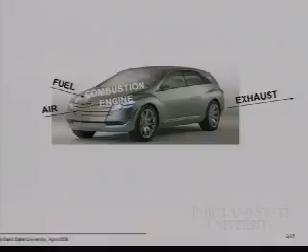So as you see here, the title is Powering the Future of Transportation. I want to begin by looking just at the automobile as we have it today, operated by fuel and air, combustion, taking that chemical energy in the fuel, transforming it into thermal energy, driving pistons, and then being able to provide propulsion. So watch carefully, there's the propulsion. If you don't mind, let me repeat that. I like that so much.

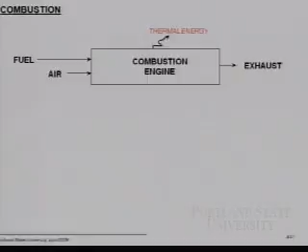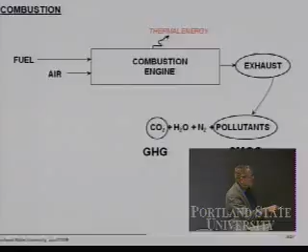There it is. But basically in a box, what we're doing is to take fuel and air in order to drive the engine forward. And it does give rise to what we want from an engineering point of view, the thermal energy, but it also gives rise to exhaust. And we have these species in the exhaust, which include the major products of combustion. CO2 is the species that leads to greenhouse gases, and then small amounts, but nonetheless very powerful amounts of pollutants that give rise to urban air pollution, which we generally call smog.

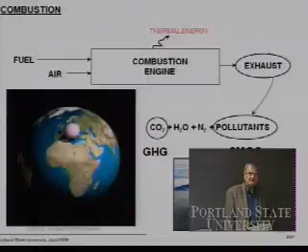To put this into the context of our natural resources, this is the Earth, and then that little sphere on there is the volume of air available to us on Earth. So that's what we're trying to protect for our own public health, and that's what we're contaminating with the exhaust to give rise to these environmental impacts. Another aspect of that air that we often don't think about is right here, which is the processing of air while we consume a tank full of gasoline. A tank full of gasoline for 20 gallons is about 160 pounds, so about a body weight.

And a good question for us is how much air do we process when we go through a tank full of gasoline? It happens to be quite a bit. It's a ton of air, 2,000 pounds. Now of that, as we know, most of that's nitrogen, but not all of it. It means that we are removing from the atmosphere 400 pounds of oxygen with every tank full of gasoline. And we have to ask, at what time will Mother Nature say, I can no longer replenish the atmosphere with that oxygen? Let me leave that question simply hanging.

But for the moment, we do use combustion for producing power. In fact, 80% of the world's power is from combustion. 94% of the world's carbon dioxide, the principal greenhouse gas, is from combustion. And 90% of the world's criteria pollutants come from combustion. We're tending to move toward a greater utilization of combustion.

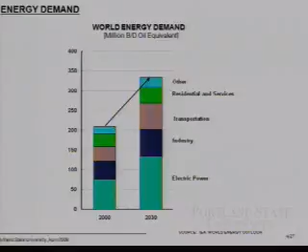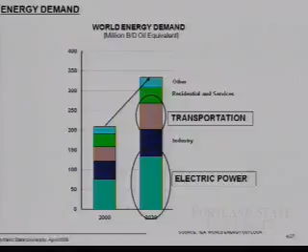Here's a plot of the amount of energy that we are consuming globally in the year 2000 and 2030. And one thing I want to represent here is simply the increase that we're going to be experiencing as now projected over the next 30 years. But I also want to indicate here how this is proportioned to transportation, of interest here, and to electric power. Both of those constitute the majority of our energy demand. Directly correlated to that is the carbon dioxide emission, or the greenhouse gas intensity. You can see they follow 1-to-1, going upwards by 2030 and having a contribution from transportation and electric power.

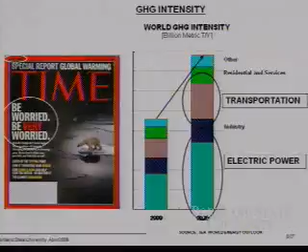That additional carbon dioxide is starting to tell a tale. And we see the tale now being represented by the media. This is my first evidence of a major news weekly stating that we have a problem. You can't see it, but this is April 2006, so about 3 years ago, almost to the day, when Time magazine said we should be worried, we should be very worried with respect to global warming, the impact of CO2.

So that's becoming a forcing function, forcing change. Greenhouse gas intensity, first really identified by the world's community as an issue not even 20 years ago today. A second forcing function goes back to the early 1940s when smog was first identified in the Los Angeles area, and a few years after that, the London episode with respect to coal particles and fog.

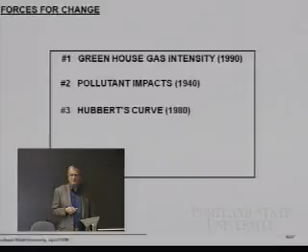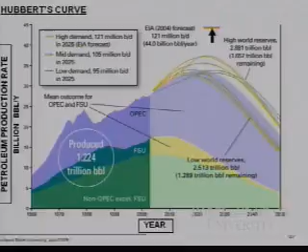A third forcing function is what I'm going to call the Hubbert's curve. This is actually very interesting with respect to driving industry to look for a different way of doing business in the oil industry. Hubbert's curve is a plot of the petroleum production rate as a function of year. And what this says is what we would expect is that as we go through the years, we're tending to want to produce more and more oil.

But what this also shows us is that there's a peak right here. It turns out to be at about 2020, where the discovery is going to be less than what we want to produce. This is now recognized within the industrial community, particularly the petroleum community, as being a reality. It's just an argument as to whether it's 2015 or 2022, but that's within basically the next 10 years, and is a forcing function to say we can't have this continuing dependency upon oil as our mobility fuel.

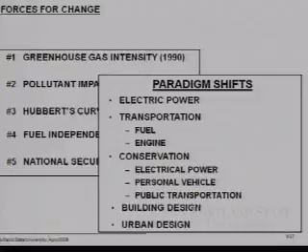A fourth and a fifth both came about due to 9/11, fuel independence and national security. So these are forcing functions doing what? They're leading to some very interesting and powerful paradigm shifts. I list them here. There are others as well, but we go from electric power, transportation, push toward conservation, building design, urban design. Many of you are engaged, maybe all of you are engaged in these areas.

As an example of a response to one of these forcing functions, global climate change, greenhouse gas intensity, is in California, AB 32. And you have something very similar going on in Oregon, although in California this is law. This is law, which states that by 2020 we must reach these levels of CO2 emissions that we had in 1990. So that represents a 30% reduction from what we're currently projecting in not so many years, 11 years. And the California Air Resources Board, who's responsible for having this be accomplished, is just now embarking on the regulatory aspects that are going to be needed to reach that goal.

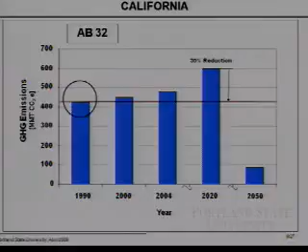Now, if you've been studying global climate change, you know that's an important step. You also know that's a remarkably large reduction for a state which is very much anxious to use its energy as much as it can. But it's not enough. We have to go further than that by 2050 to really make our contribution to bringing the greenhouse gas intensity to a level of reasonable state.

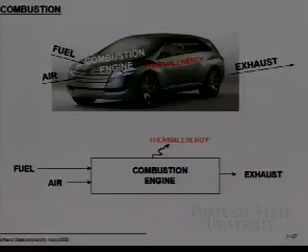Now let's take that background and focus in today's presentation on these two topics. I'm going to emphasize transportation, but we're going to end up talking about a nexus between transportation and electricity. As a result, I put all of that into the box. And I want to come back first to this diagram that we've just discussed at the beginning and start to work through it as to what changes we're making in this area by way of paradigm movements.

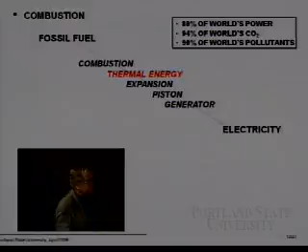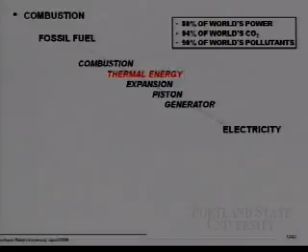Here we have combustion, which is taking a fossil fuel and through a variety of steps transforming it into electricity. We have the combustion, the thermal energy, and then that thermal energy expands, drives a piston, and turns a generator. Now I want you to be thinking from a transportation point of view of a Prius, of what we're doing in a Prius with the combustion engine to produce the electricity that then drives an electric motor and propels the vehicle forward. But we also do this to create the electricity in this room to a large extent. And we have these results that we alluded to earlier.

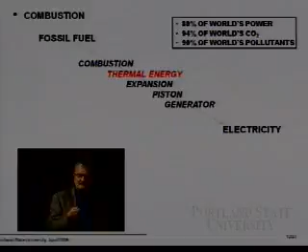You can almost feel intuitively from this sequence that there's some challenges that we've had to address over the years. Combustion leads to the formation of these criteria pollutants. In the combustion science community, we've done a remarkably good job to reduce the pollutant emissions from automobiles, from power plants. We've gone as far as we can, and yet it's not enough. And then you can see there are these processes that almost cry out inefficiency and metal moving against metal. They give rise to relatively low overall efficiencies in the transformation of that fuel to electricity.

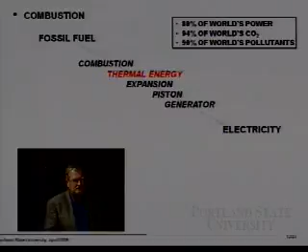What's going on is a substantial emphasis to look for a combustion alternative. And what's emerging is the technology of fuel cells, where in one step we go to electricity through something that's called electrochemistry. No combustion, so no formation of criteria pollutants.

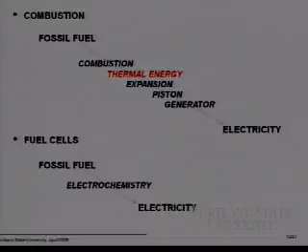And you can almost intuitively feel no metal on metal, so relatively high efficiency, and in fact it is. The other attribute is it's relatively low in noise. It's basically benign, no acoustic emission, almost to a fault. It's hard to convince you that it's actually working because we're so used to cranking and chugging and metal on metal.

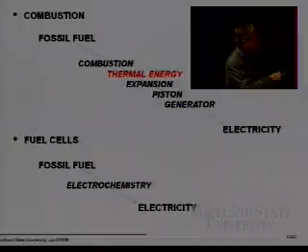So let's talk a little bit about this so that you can appreciate what it is that we have in our future. This is a fuel cell representation. There are three layers here. This green one is called an anode. The blue one is called a cathode. And that kind of orange in between is an electrolyte.

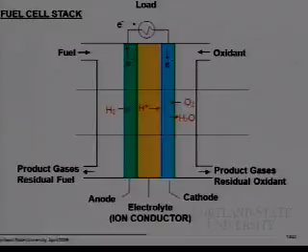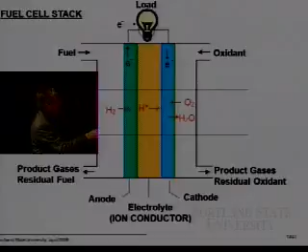Fuel comes into the anode, as you see here, hydrogen, and it reacts at the surface to form a proton and some electrons. The electrolyte says, proton, I welcome you, come on through. It says, electrons, get out of here. You're not going to come into my space. And sends them through another path, which for us is good because that path is a circuit where we can drive a load. And then the electrons come back to the cathode side, ionized oxygen that's coming in, and then that ionized oxygen combines with the proton to produce the product of water.

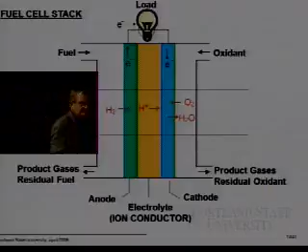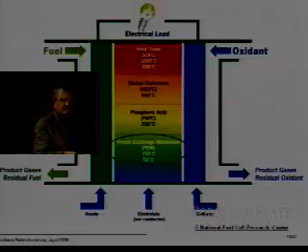There are different fuel cell types. They vary in the electrolyte, they vary in the temperature of operation. And here I show you those different types. This is the proton exchange membrane fuel cell. You may not be able to see it, but it operates at about 100 degrees Celsius. All right? And that's the go-to fuel cell for the automobile. The reason is that it doesn't operate at that high a temperature, and it's a fuel cell that you can turn on and off, which we want to do in an automobile.

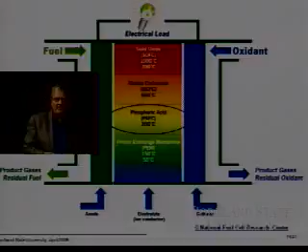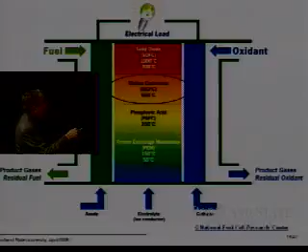These fuel cells up here are bigger, and they operate at higher temperatures. This is a phosphoric acid fuel cell that operates at 200 degrees Celsius. Takes about 3 to 4 hours to get started once you turn it on. Molten carbonate fuel cells, 650 degrees Celsius. Takes about 8 hours. This is now very popular in the marketplace. We call them advanced fuel cells, high temperature fuel cells.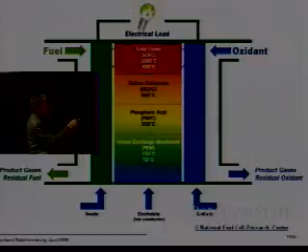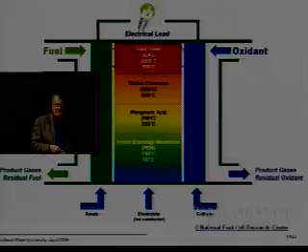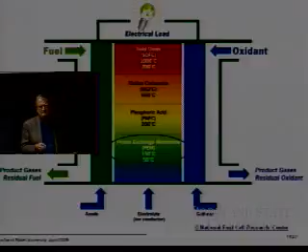And there's quite a bit of development going on in what's called solid oxide, which we often state is a holy grail of fuel cell technology for stationary applications. That will operate at 1,000 degrees Celsius. In the next year, we expect to see the first deployment of a commercial system. So these three are stationary fuel cells for electric power generation. And then down here is the proton exchange membrane fuel cell for the automobile. I'm going to focus on the PEM for the moment, and then I'm going to come back to the large fuel cells because there's a connection between the stationary fuel cells and our transportation requirements in the future.

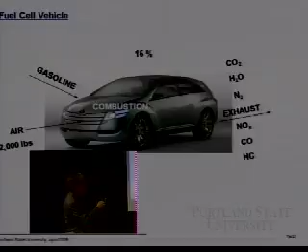So on PEM, let's go back to the automobile operating on combustion. Let's just start by replacing the gasoline with hydrogen. But first I want to point out that the automobile efficiency is 15%, which means that 85% of the energy that you pump into your gas tank is thrown away to heat. So you pay for your gasoline the next time, $30, multiply that by 0.85, and that's the money that's not going to be used at all to get you from point A to point B. Here's the 2,000 pounds of air that's required to process the tank full of gasoline.

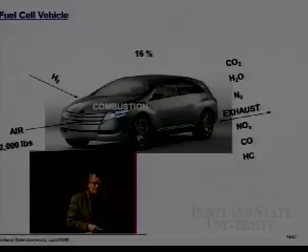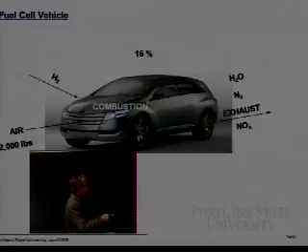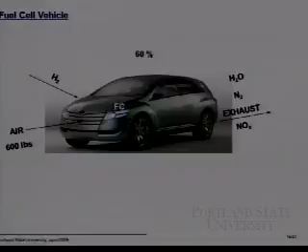Now, the fuel cell future likes to operate on hydrogen, so we are looking to hydrogen as being the fuel. It has quite a few attributes on this chart. One is that the carbon-containing species here in the pollutants go away, and then the greenhouse gas here goes away, at least with respect to the automobile operation. If we replace the combustion now with a fuel cell, we up the efficiency quite a bit. And that's one of its attractive features going forward. That reduces the amount of air required per 400 miles and almost reduces, and I think eventually will reduce, the oxides of nitrogen to negligible levels. Not quite there yet.

Examples of this that are being deployed and evaluated today is the Toyota Highlander hydrogen fuel cell vehicle. The first one to be deployed in the United States was in December of 2002, so 7 years ago. As a result, we've been doing this sort of thing for a while. We now have General Motors with their Equinox vehicle through their Project Driveway program deploying 100 of these around the country to people like yourself. You could sign up and be qualified. Most of them are in Orange County, California, about 60, some in Burbank and others in the Northeast. And we have a very aggressive campaign by Honda with their Clarity, where they're also allowing the public to have access to this vehicle and to drive it.

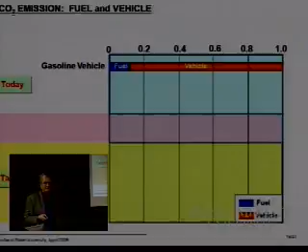One of the things I'm always reminded of when I look at this is how remarkably far over 100 years we've come in the efficiency of generating gasoline. It's not only due to the 100 years of technology development, but due to the competitive forces, where 88% of the gasoline that we get to dispense came out of the well. In other words, only 12% is used to extract it, transport it, refine it. And that's why this amount is relatively little. It's right around 12%.

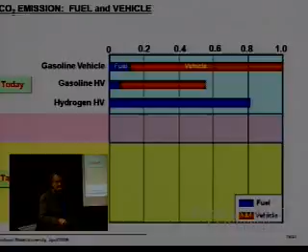If we look now at the hybrid vehicle, like the Prius, we see the improvement that we expect, like a factor of 2, because it's a factor of 2 more efficient. If we now take that same Prius and operate it on hydrogen, what do we expect? We expect that this carbon emission from the vehicle will go to 0 because there's no carbon in the fuel. We just showed that. And that's exactly what happens. There's no orange. But one whale of a lot of blue.

And this is where we're getting the hydrogen, in this case, from natural gas, which is the go-to source today for hydrogen. It also points out why operating a car on hydrogen with combustion is perhaps not the best strategy. It not only produces criteria pollutants, but it isn't that efficient. So here you get that 16% versus 60% argument. So if we now add a fuel cell, that gets reduced, but not nearly what we think it should be for this effort, this paradigm shift for the future.

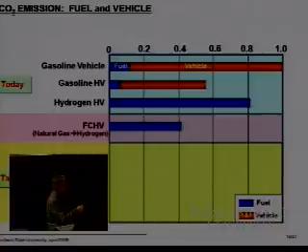So we have some targets down here. We think we're going to, and already are, improving not only the natural gas production of hydrogen, but there are also substantial improvements month by month in the efficiency of the fuel cell by the competitive forces, primarily between Toyota and Honda. But we can't rely upon natural gas for our hydrogen in the future. In the United States, for fuel independence, our major opportunity at this moment in time is seen to be coal.

Now, a lot of effort is being placed in coal. Coal has the highest carbon to hydrogen ratio of any fossil fuel. Natural gas, the lowest. A lot of emphasis is being placed on future power plants with coal that operate with 0 criteria pollutant emission. That seems almost impossible, but we're pretty close. And then you've heard about capturing the CO2 from a pure stream and then sequestering it, as a strategy to bring this down.

We also have, though, the pressure on us, appropriately, to produce hydrogen from renewable sources, such as solar and wind, that would then electrolyze water. And that's a very attractive signature compared to where we are today. So this is starting to make some sense, that this is the path we should be on. And we have another renewable source from biomass that is also looking very viable for the production of hydrogen. Overall, though, our goal is to bring these signatures down to very low levels. And today, a lot of research is going into that objective.

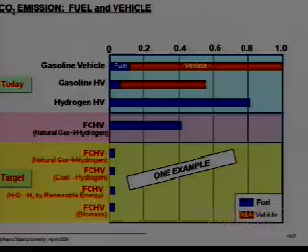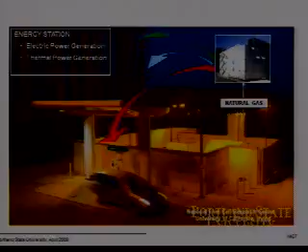It is today by far the most energy efficient and environmentally responsible means of producing hydrogen 24/7. So solar and wind still are much more acceptable and needed, but they are intermittent. We have to have a 24/7 buffer, and this is emerging as being kind of the poster child for that.

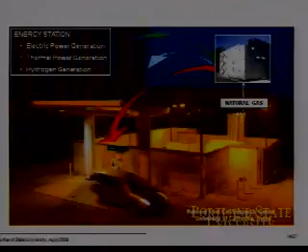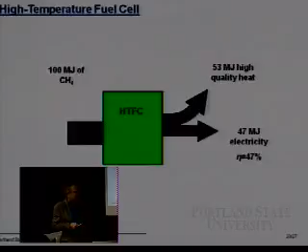The way that operates, here's the high temperature fuel cell, and I'm just going to give it to you in terms of based on 100, so 100 megajoules of methane will produce electricity at almost 50%, and then produce this high quality 650 degree thermal product that can be used to drive an absorption chiller for chilling or for producing steam. This is very valuable.

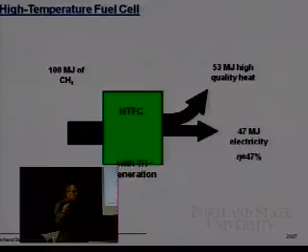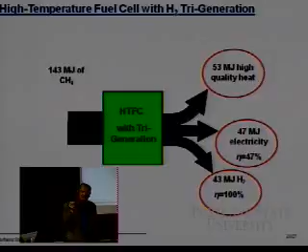If we come into this tri-generation, this new technology, I want to demonstrate to you what happens by increasing the amount of energy input or natural gas going into the system by about 43%. And if I do that, I'll maintain the same amount of electrical production and the same amount of waste heat, high quality, but I will produce 43 megajoules of hydrogen at 100% efficiency. We just don't do that in engineering. But there's a synergism here in the fuel cell that gives rise to this very positive result.

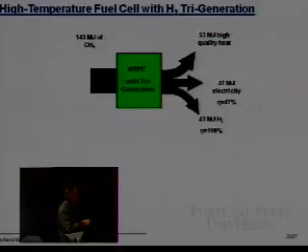Now, some of you who may be studying this know that we use other technologies today like electrolysis for production of hydrogen, and the efficiencies there are just above 60%, and then steam methane reformation is right around 66%, just to give you a bit of a contrast. So this should give you some hope that there are technologies evolving to help support this future.

But you might say it's still operating on natural gas, that fuel cell, and you're right. Now in some states, and right now there's 13 states in the country that believe fuel cells are so magnificent they call them renewable. They're the same as solar and wind, even operating on natural gas. That's incredible from a policy point of view. Absolutely incorrect and kind of misdirected. But I want you to know that we do have states that have claimed fuel cells are renewable.

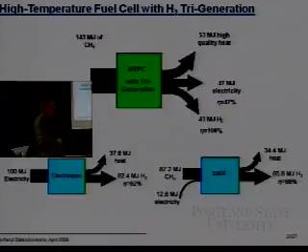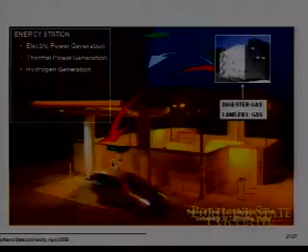But there is a way to make a fuel cell truly renewable, and that's to operate it on something else than natural gas, a renewable fuel, a digester gas from a wastewater treatment plant, or a landfill gas. Produce all of our energy streams as we had before, but now have a green energy station with green electricity, a green thermal product, and green hydrogen. Too good to be true, I think.

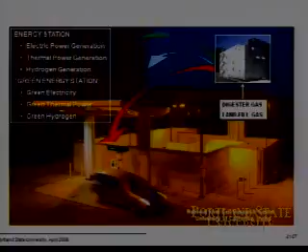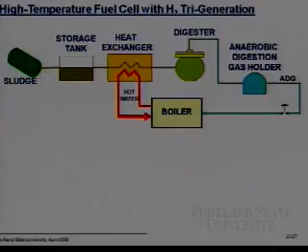Not really. This system is being beta tested right now in Danbury, Connecticut on natural gas after 5 years of development. And in a couple of months, it's going to be relocated to a wastewater treatment plant in California, right off the 405 interstate. Now, most of us have not seen a wastewater treatment plant and don't wish to. This is where we're treating all of our waste. And there's various aspects of it, but a key is this digester where residence time and temperature allows a lot of our waste to be broken down to where it can be appropriately disposed.

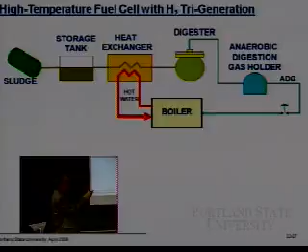But out of that comes a gas. It's called a digester gas, primarily methane, fortuitously, just like natural gas. And then it is used to go into a boiler and provide the temperature for that digester. That's the way it works today.

What we can do is come in and replace the boiler with a fuel cell that not only provides the waste heat for the digester, but provides in addition electricity. Not only for the plant, but it could be for recharging in the future. So here's kind of the first taste of this connection between electrical power generation in an environmentally efficient way and transportation. But you now know that we can also produce on demand hydrogen, the second application at the connection between

transportation and electricity. This particular project is due to be commissioned in October 2009, and you may want to just keep your eyes on that success. It's a strategic alliance between Fuel Cell Energy, Air Products, and the National Fuel Cell Research Center using a technology that came out of the National Fuel Cell Research Center. So example one of this nexus, transportation and electricity.

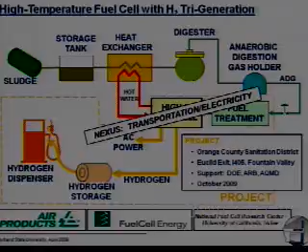The second example is dual fuel. And you've had a lot of attention this week in Portland on the electric vehicle. What I'm showing you here, you're then aware of, which is to take this Prius or this hybrid vehicle and to increase the size of the battery. And note that I'm operating this on hydrogen in a fuel cell. That makes a lot of sense. That's what we're actually anticipating, is that the future is a hydrogen fuel cell vehicle.

And should the PHEV interim activity be successful, you should fully expect that the hydrogen fuel cell vehicle of the future will be a plug-in, where this battery is increased in size and then it's plugged in for getting an all-electric range of something. Rule of thumb is we would need to get 40, 50 miles of all-electric range. That's the concept. And most of us don't drive that far every day, so it means that even though we have a vehicle with hydrogen on board in the future, or in the interim gasoline, that we will be able to supply our fueling needs, by and large, with

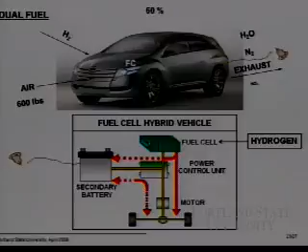electricity. We'll also use less electricity than we would if we have an all-electric vehicle, because we'll have a backup should we run out of electricity. We've got the gasoline, or in this case, the hydrogen, to back us up. So this is what we're calling a fuel cell plug-in hybrid vehicle.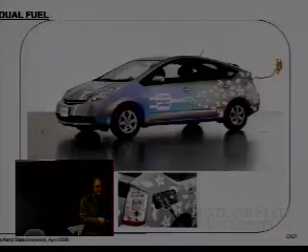This is the Toyota plug-in that we're currently testing for its future with respect to emissions, fuel economy, and social acceptance. And it is an example of a major OEM exploring this future. So it gives us some evidence that this may be on the radar of OEMs. So that's the second example of transportation electricity nexus.

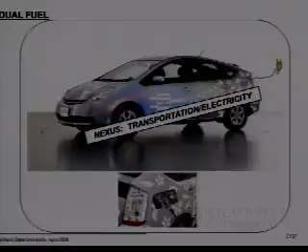What happened? Nothing. I'm in full control. So I'm on slide 23 of 27. I would say it's not over. And it's not over because I just want you to take a breath here because I want to take technology one step further. Are you okay with that? All right.

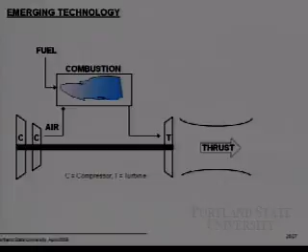You recognize that? Probably not. This is the gas turbine engine under the wing of an aircraft. It's called the Brayton Cycle. Some of you have looked out the window from the terminal and see these big blades rotating. Those are the compressors that suck in the air, compress it to an elevated pressure and temperature, put it into a box that we call a combustor. We add fuel there. That's where the combustion takes place.

And then that high temperature and high pressure gas comes out of the combustor, goes through a turbine that's used to drive the compressor through that shaft, and then the remaining enthalpy or energy is then expanded into velocity, kinetic energy, to provide that thrust to propel us down the runway and to our destination. So we all know this, we hear it, we watch it, it's an integral part of our lives.

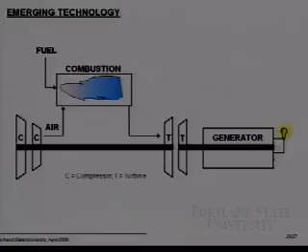This technology is also the go-to technology for producing electricity. And we do that by taking away the nozzle and replacing it with another turbine and a generator. We don't know that because we don't see that, but I'm here to tell you that that's the case. This today is the energy strategy used throughout the world to produce electricity, the most efficient and the lowest in pollutant emissions. Still has combustion.

So the technology is not this. It's the fact that we have discovered in the last 10 years that we can remove combustion and replace that with a fuel cell. For you thermodynamicists, that takes away the Carnot efficiency constraint of thermodynamics and replaces it with a much more flexible Nernst potential constraint for fuel cells.

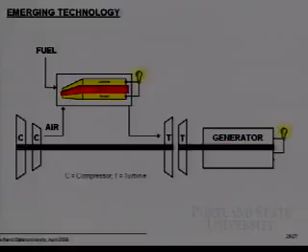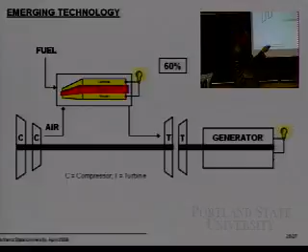And you notice that we're not only producing electricity here, but we're also producing electricity here while we are chemically treating the fuel to produce the thermal energy that we require here. This is giving rise to incredibly high efficiencies of fuel to electrical. Right now, this grid is about 35%. So coming out of the box in the first demonstration of this a few years ago, 60%.

But it has the potential of getting higher. The first commercial one will be about 65%. And the optimization we're doing now is going to get us easily to 70%. And the only question is, how much higher can we get above 70%? High fuel to electrical conversion efficiency. You must remember that fuel cells have zero emission of criteria pollutants, and they're acoustically benign.

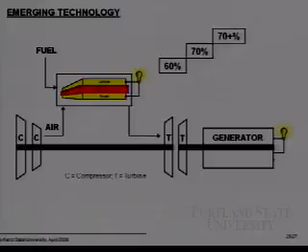So very attractive for the future, from distributed generation, like supporting the electricity of this building or hotel in the future, to a central power generation. But we're here to talk about transportation. And I must admit that we're calling this right now a hybrid fuel cell gas turbine. So this is not a Prius. This is a stationary hybrid.

We need a better name, like turbo fuel cell. I like that. But hybrid has already caught on. The train's left the station. We don't know if we can pull that back. So keep your eye on this. What I want to bring to your attention, though, is the number of transportation strategies that rely upon electricity, other than the automobile. The automobile is moving to an electric drivetrain. That's the Prius.

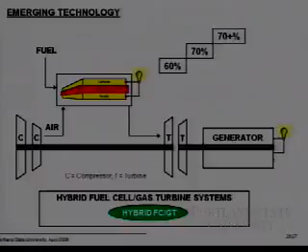But what about other technologies? Locomotives. Those are diesel electric, operating at maybe 30% efficiency, putting out a lot of air pollutants, particularly smoke and particulate. Can you imagine repowering this with a hybrid fuel cell gas turbine? 70+% efficient, more than doubling the efficiency, zero criteria pollutants. Have you thought of any others that are electrical?

Oh, ships. So this portends the future of propelling ships as well. Also, long-distance trucks could very well utilize this technology for their propulsion. And you won't accept this, but aircraft. But please accept it, because both Airbus and Boeing are competing with each other in this space. Last spring at the Paris Air Show, Airbus had an aircraft there that said fuel cell powered on it.

So a lot of work is being done right now with both Boeing and Airbus, not for the propulsion, but for the hoteling, the controls, the electrical, the heating, and ventilation, which constitute quite a bit of energy of the aircraft, pressurization as it flies. All of these would be operated initially on conventional fuels, diesel, probably not bunker C, but diesel, and Jet A. So there are reformation technologies that have been developed to accommodate that, to reform the fuel to hydrogen.

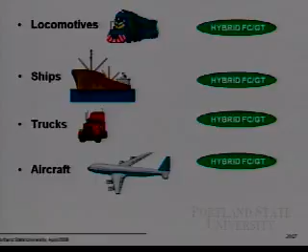But the future probably portends, in my estimation, these being fueled by liquid hydrogen. Now you may say, that's not going to happen here. But it has happened. There's been an aircraft flown by the Air Force on liquid hydrogen, and we have a major program right now with Boeing on exactly that. So it's very serious, and if you start to look at it, it actually makes a lot of sense. So another nexus of transportation and electricity.

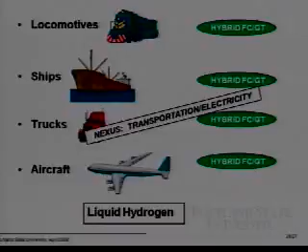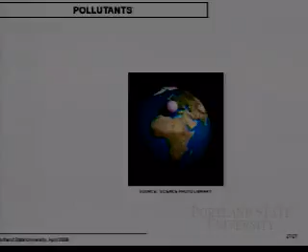So let's conclude with this slide. This is 27 of 27. I want to simply mention again this treasure that we are working to protect of air in our Earth system. We've talked about greenhouse gas emissions into that atmosphere. We've talked about criteria pollutant emissions into that atmosphere. I brought something to your attention I really want you to think about and start watching the literature for the first evidence of measurements of the reduction of the concentration of oxygen in the atmosphere. That's going to be a remarkable wake-up call to the public.

But we've also talked about this nexus of transportation and electricity. And I'm going to conclude by saying we also have another important nexus, and if I didn't mention it, it would be irresponsible, because it has to be on our agenda, which is water. The utilization of water to produce these alternative fuels. In many cases, it's huge, and it's got to be near zero, if not zero. In the energy regime, well, even before I get to that, let's just open this up and look at the amount of water we have on the Earth.

After a few days of viewing this, I began to absorb that. The atmosphere is 10 miles thick. Earth is 8,000 miles in diameter. I'd probably come up with a volume like that for air. But when I saw this for water, I said, that's not possible. That must be only the potable water.

And it's not. It's the seawater, the potable water, the river water, the Willamette water, the ice caps. It's still hard for me to accept that. So I challenge you to verify that. But that's a smaller resource even than the air.

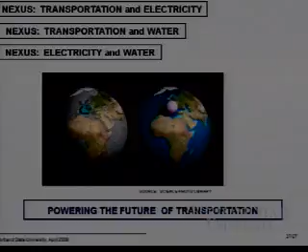As a result, the powering of the future transportation will depend upon all of us keeping into account these resources that we need to protect and maintain, as well as to assure that their health is sustained. And with that, let me thank you.